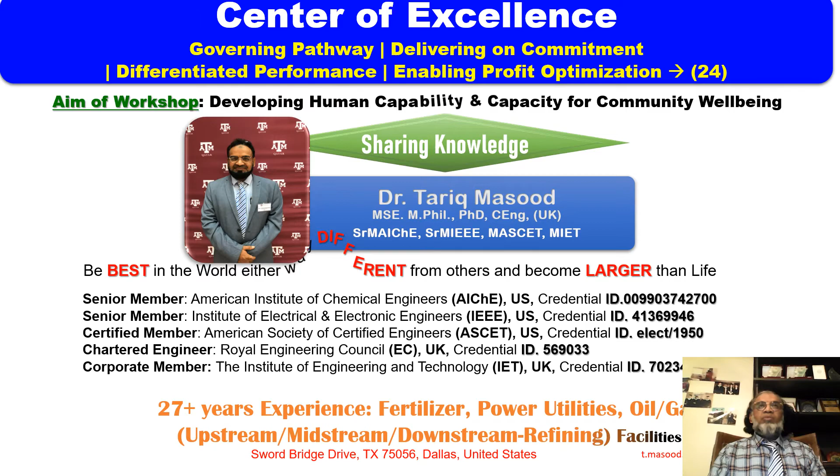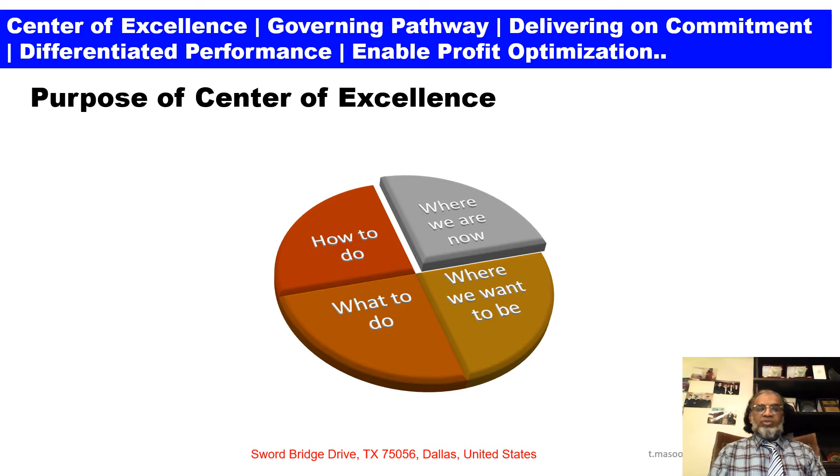Okay. Center of Excellence, lecture number 24, SIL Study Guidelines, section number 8. Purpose of Center of Excellence: where we are now, where we want to be, how to do it, and what to do. We are still working on the safety integrity level assessment study guidelines, and after completion, we are going to discuss the risk assessment management system in my next section.

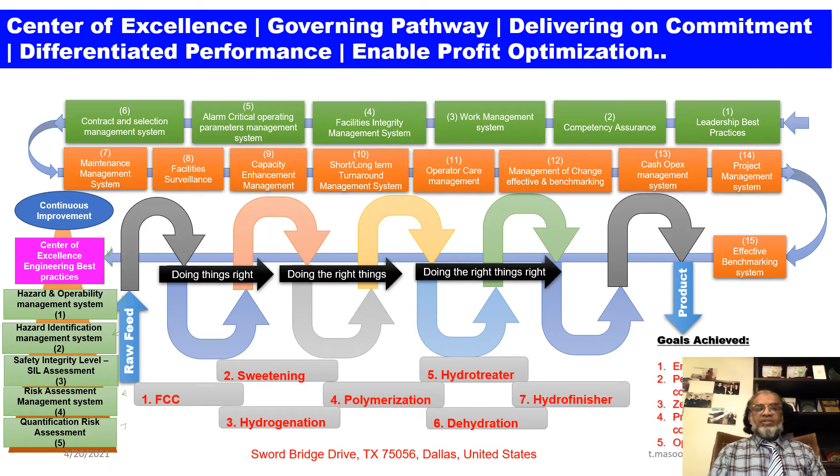Okay, key takeaway points from lecture number 24, SIL study guideline, section number 8. First, the LOPA analysis steps. Then the SIL, PFD and RRF relationship. Recording, reporting, and follow-up will be the last topic. This is the forward message already discussed in my earlier lectures.

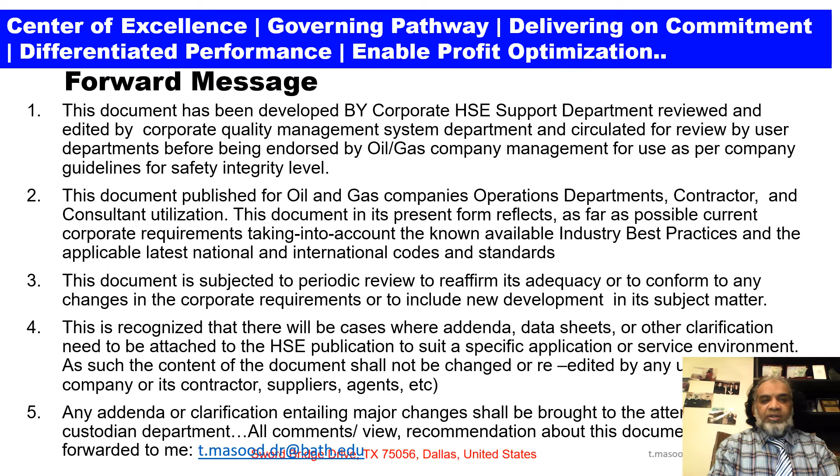Identify and list all safety instrumented functions, SIF, for the unit. For each SIF identified, define the worst consequence if the SIF failed to operate when demand occurs. The hazard report may also be referred to identify the consequences, categorize the consequence severity, and tolerable frequency for the SIF. The tolerable frequencies we have already discussed in the earlier tolerable risk criteria for LOPA study.

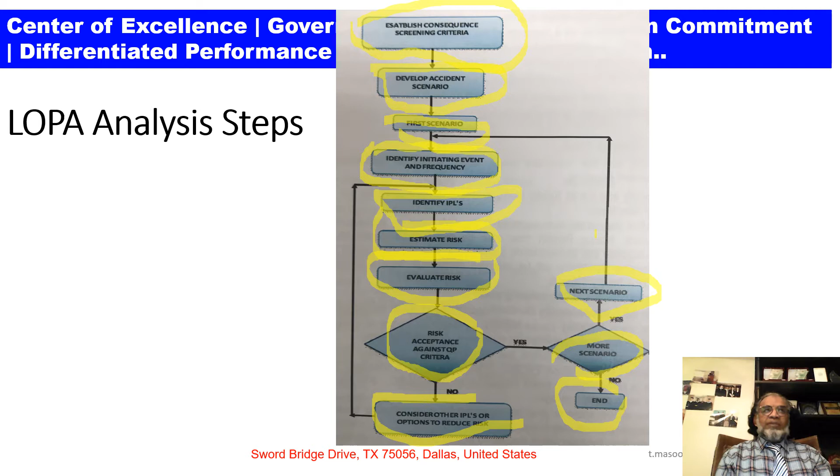While determining SIL for the SIF, corresponding SIL for RRF calculated using the LOPA sheet should be expressed along with RRF. For example, if the RRF determined is 70, over here, the selected SIL should be expressed as level 1. Okay, SIL will be level 1 for RRF 70. This is to facilitate the functional safety consultant to verify whether the SIF meets the required integrity during design SIL verifications.

Okay, note. For a new system, if the target RRF is more than 50% of the SIL band, then the next higher SIL level shall be adopted. This is to consider the decrease in reliability, that is PFD, with the aging of the SIF.

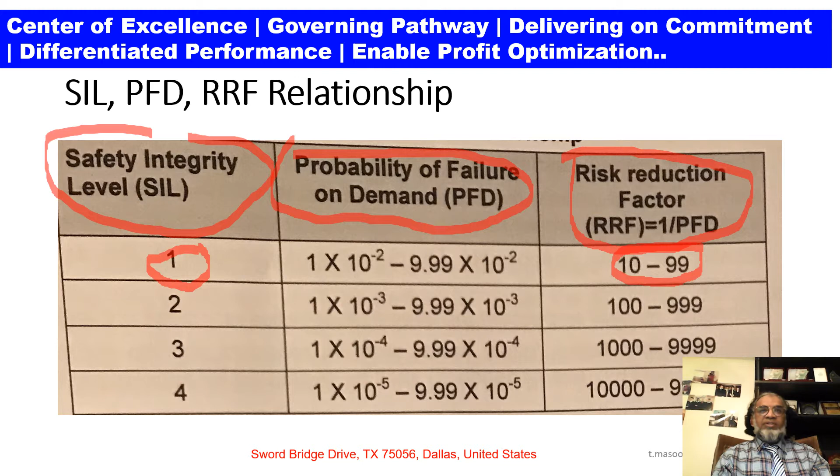Okay, recording. The findings of the application of the methodology presented, as we have discussed, shall be recorded during the session by the scribe with a computer spreadsheet or dedicated SIL software. The scribe records the results of this identification activity in a table type file using a computer and video projector. Use of the video projectors shall allow the team to visualize the record.

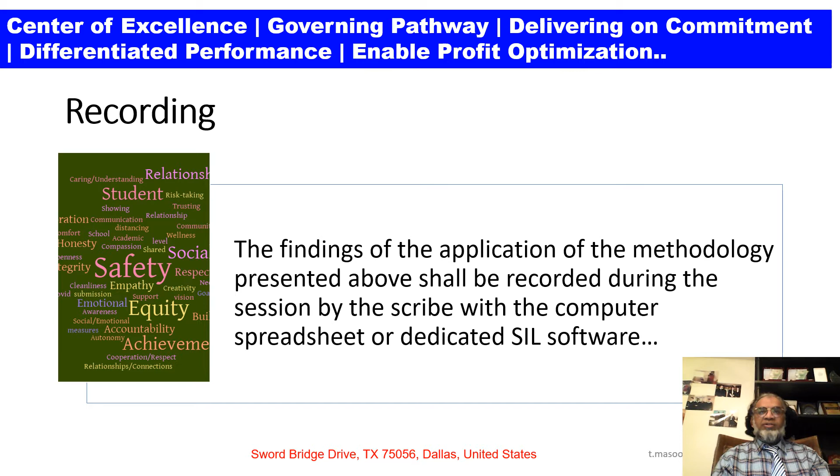SIL study worksheets given in Appendix 1, which I'm going to discuss in my next lecture, shall be followed for calibrated risk graph methods, while LOPA methodology shall follow the format given in Appendix 8. Upon completion of the study, the chairman shall produce a report which discusses the findings of the study and details on the critical findings. Next is the reporting and follow-up.

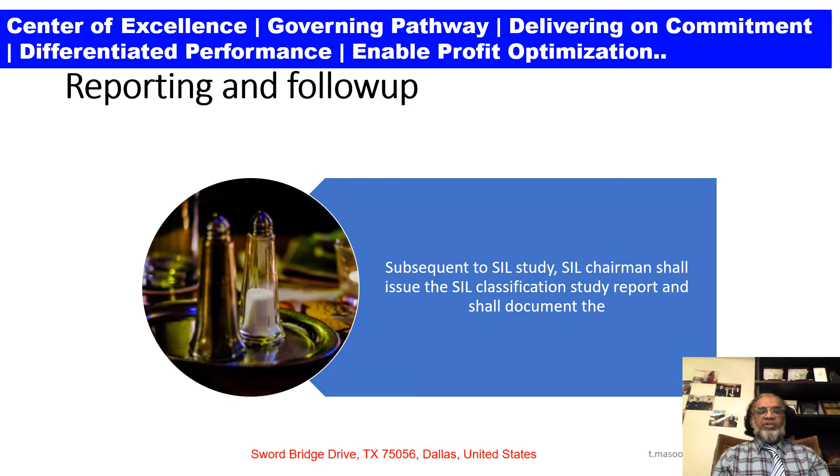Subsequent to the SIL study, the SIL chairman shall issue the SIL classification study report and shall document the following, as we are going to discuss. The minimum contents as in Appendix 3, the full list of the table of contents of the report, will be demonstrated on my next slide. First is the scope of study, study methodology, and the study team. The SIFs reviewed and the references used; summarize and present the SIL study proceedings.

All the recommendations and actions raised with a proper reference for closeout action to be carried out. Next, identify a list of those responsible for reporting responses to the actions and recommendations. And last, schedule, monitor, and record the execution of necessary closeout action points.

Okay. The recommendation, action, and query items shall be recorded and a corresponding SIL action sheet, as we are going to discuss in Appendix 2, shall be generated for subsequent follow-up by the project. The project engineer shall have the responsibility to ensure appropriate project follow-up of the actions and recommendations generated during the study, as implemented in Appendix 2 in my next lectures. A formal SIL closeout report with a SIL verification study shall be submitted to the relevant department for further approval.

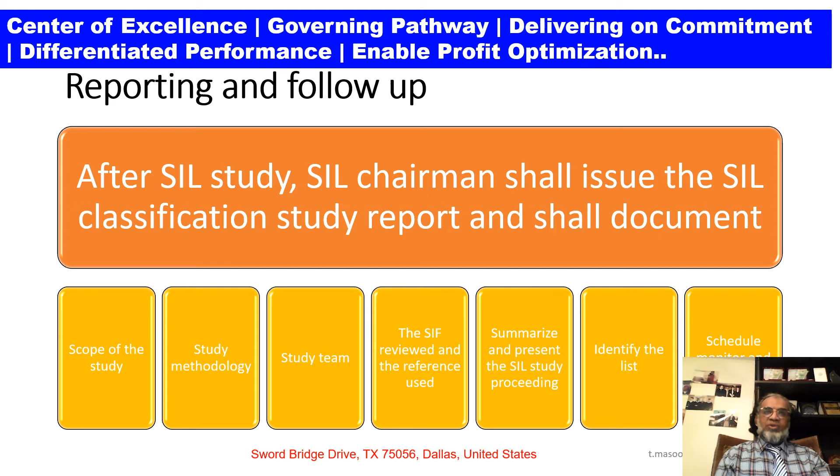Okay, on my next slide we are going to discuss the SIL verification method. SIL verification shall be performed by a relevant company department-approved third-party consultant led by a certified functional safety expert and shall follow IEC guidelines. Okay, the SIL verification method. A SIL verification shall be performed by a company-approved third-party consultant, led by a certified functional safety expert, and shall follow IEC guidelines. A SIF consists of three parts and can be distinguished as identified in IEC 61508.

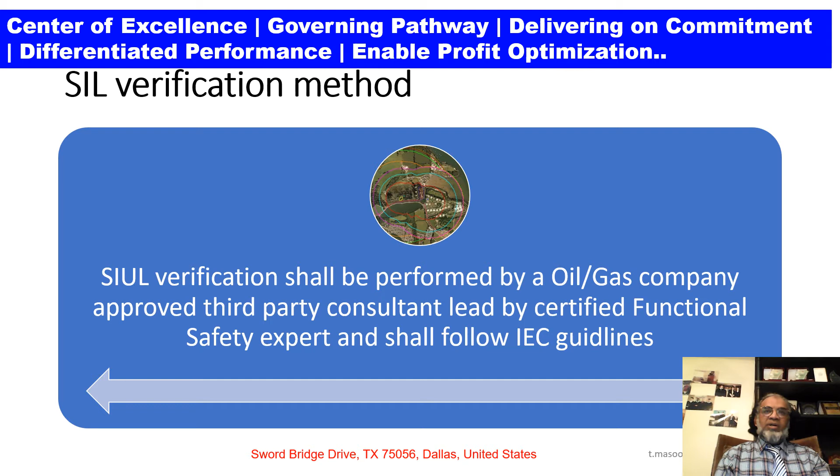A quantitative SIL verification analysis for protective functions identified as per the hazard scenarios discussed during the SIL study shall be carried out for all SIFs with SIL greater than or equal to 1 during the implementation phase. The calculation shall be carried out as per the guidelines set forth in the International Standards IEC 61508 and 61511. SIL verification should be carried out based on the different aspects.

Furthermore, the proof test interval for the subsystems of SIS shall be agreed by the company at the beginning of the project or during the SIL assessment process. Considerations may be given to final elements with the facility for a partial stroke test. Agreed spurious trip failure and dangerous failure rates for each SIF. Number 3, data sheets and third-party certificates for failure rates of the subsystems of SIS submitted by the vendor. In case generic failure rates for the specific components of SIS need to be used for design SIL verifications, prior approval from the company is required.

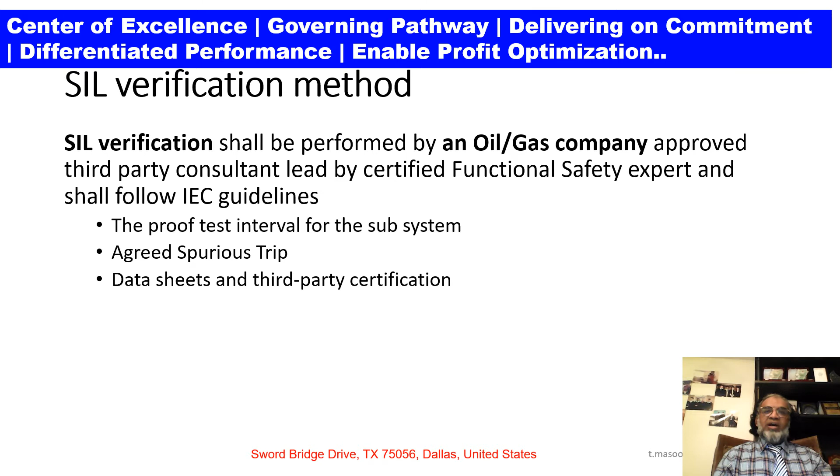If parts of the proposed SIF involve use of already existing SIS, then failure rates of such existing subsystems are still credited using the time-in-use factor and are to be considered for SIL verification. The data and approval should be obtained from the company as required.

Okay, SIL verification report. The SIL verification report provides the following output: PFD of the proposed SIF, achieved SIL and RRF of the SIF, and spurious failure rates expressed in terms of years. The SIL verification shall be performed under the guidance of a functional safety consultant with a CFSE certification and training in LOPA analysis.

Okay, if the SIL target cannot be met during the SIL verification, the following should be addressed and documented by the team that performed SIL verification. Number 1, provision of additional devices or replacement of the existing device, especially the initiator and/or the final element. Review of the test intervals of the specific SIFs. However, any changes to test intervals shall be reviewed and approved by the department.

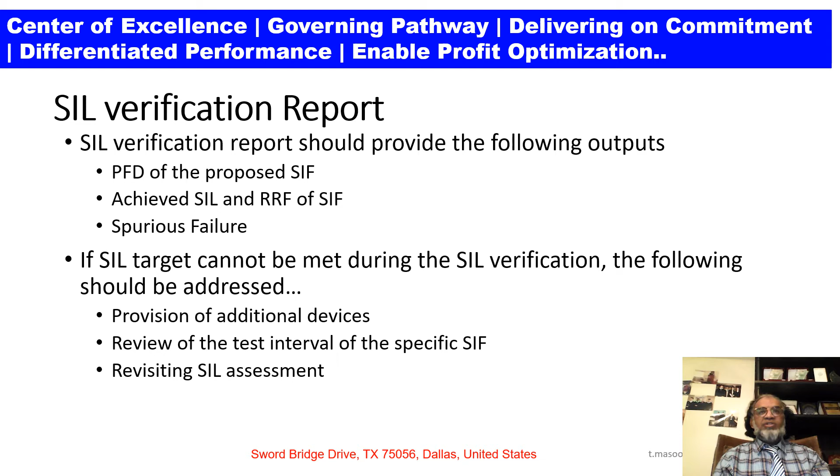Revisiting the SIL assessment if there are any additional layers of protection introduced after the earlier SIL assessment, and this is subject to review and approval from the department side.

Okay, safety requirement specifications, SRS. The safety requirement specification shall be developed for all safety functions with SIL for all identified SIFs in compliance with IEC 61511. The document shall be the basis of design of the safety instrumented system and shall be used for validation of the SIS during factory testing and integration.

The SRS shall include the detailed list of IEC 61511 requirements that shall be sufficient to design the SIS. The SRS shall be prepared by a department-approved third-party consultant led by a certified functional safety expert and shall follow the IEC guidelines. Okay, next is SIL validation.

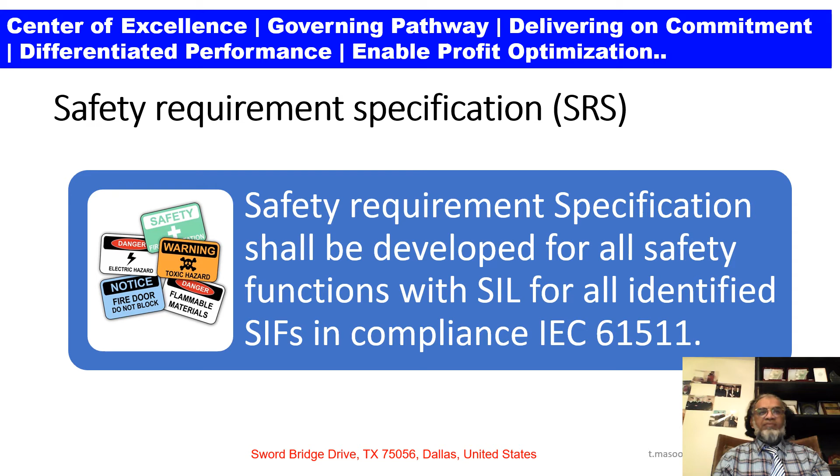Okay, SIL validation. SIL validation shall be performed during the FEED stage, EPC stage, and commissioning for all SIFs with SIL equal to or greater than 1, after the SIFs are installed and before introducing the hazardous fluid or chemical in the equipment. The SIL validation study shall ensure that the target SIL is physically achieved, by field verification for all SIFs, 100% verification.

SIL validation shall be performed by a company-approved third-party consultant led by a certified functional safety expert and shall follow the IEC guideline, IEC 61511 clause 15.

Okay. As a minimum, validation activities shall ensure the following SIS tests or inspections, including: number one, physical inspection of SIS components; check the SIS against the engineering documents and SRS; review and verify SIS documents, the safety manual, verification of the proof test period and maintenance procedures; verify response timing requirements for SIFs; check the performance of the SIS sensor, logic solver, final element, etc. under normal and abnormal operating modes, startup and shutdown conditions.

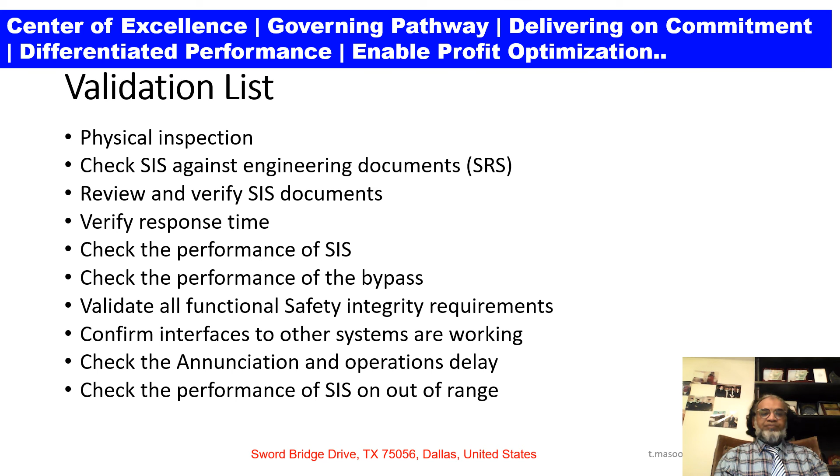Okay, so over here, in case of the safety application software, the installation will be verified against the SIS software with the following validation as a minimum. Number one, quality system certificate of the software system supplier; validate for each mode of process operation before mechanical completion. Check the response of the software program under SIS fault conditions, degraded modes of operation, etc.

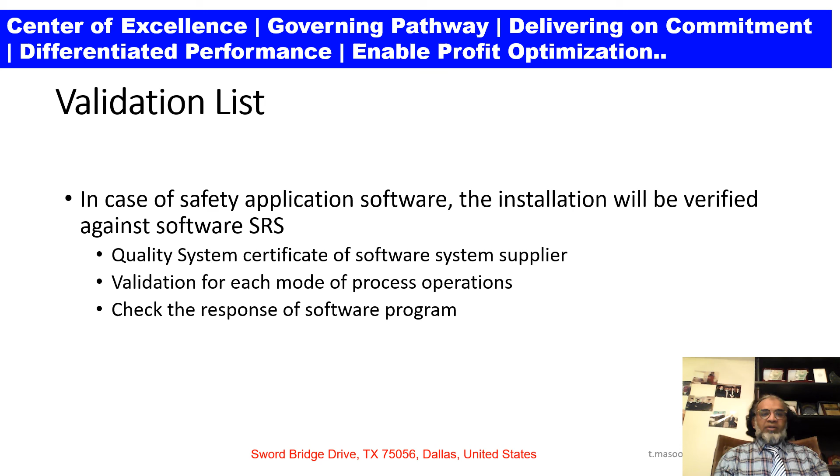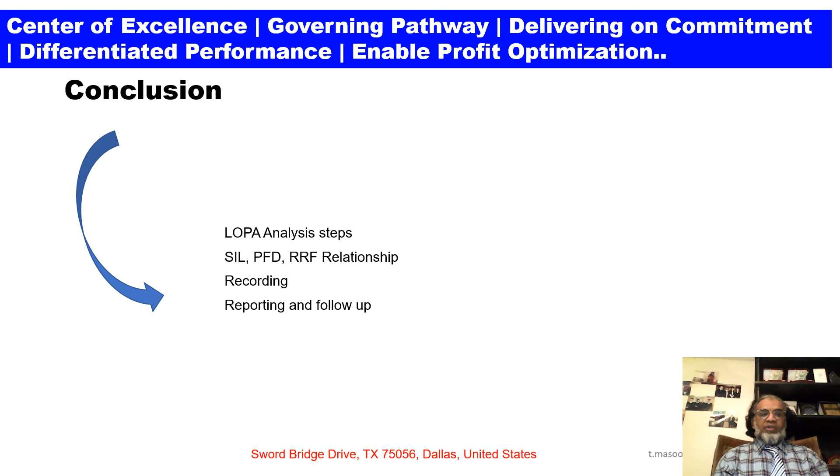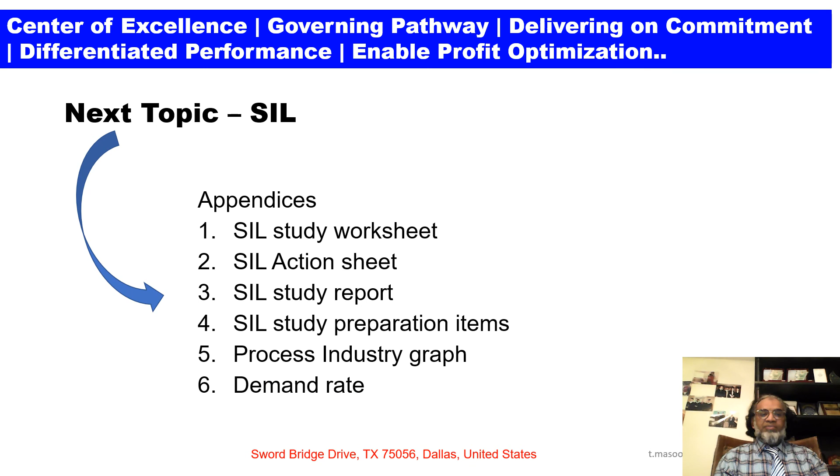Okay, conclusion. Today we have discussed LOPA analysis steps, the SIL, PFD and RRF relationship, recording, reporting and follow-up, SIL verification method and safety requirement specifications, and SIL validation list. Next topic, we are going to discuss appendices: the SIL study worksheets, SIL action sheets, SIL study report, SIL study preparation items, process industry graph, demand rate, and corporate risk matrix.